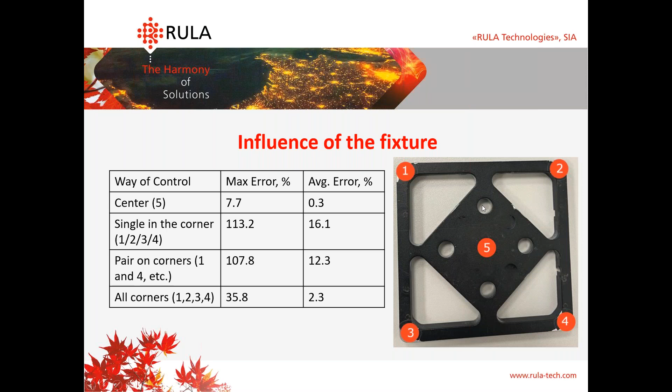And after that, we placed 4 sensors in all corners. I'll show you this example today. And that gave us a way to handle our testing object, and we got the best results. So I think now we can continue with ways of control for multiple channels.

Philips, could you please answer my question? How many ways of control for multiple channels do we have in TestUp? In TestUp, now we have 3 basic ways. It's the control by maximum, the control by minimum, and an average-based way. An average-based way can be split in 2 parts.

The first one, when we enter weight coefficients for the channels as 1, that means that we will calculate an average value using this left formula, or we can set the weight coefficients for the channels. For example, we can enter values like ones for left and right sensor when we have a beam, and a higher value, for example, 3 in the center sensor. That means that the center sensor will have more control value than the others, and in that case we will use this formula.

We will get the channels data, after that multiplied by the coefficient, and in that case we will get the best results. I'll show you the correct example of using this feature using the shock test, but it will be a little bit later. Do we have any other questions?

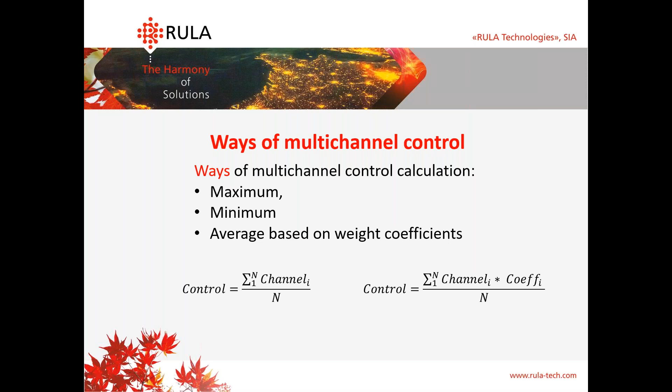It only helps us to avoid the amplitude peaks on these frequencies, and we'll have a sine test example where we will avoid resonances and you'll see it better. Thank you. And now another important feature we have in multiple control channels is protection. In our newest version, we implemented individual limits for abort and tolerance. We can set notching limits. I'll show you also an example.

It can be set as stable now. For shock tests, we implemented individual filtering options. And of course, for sine test, we have a brand new feature which is called open channels control. And it is a really interesting feature because you can continue to run your test when some of the sensors are damaged or disconnected. And of course, I think we will improve this feature. We will improve the channels number for this, and I'll show you also an example of using this feature in TestUp.

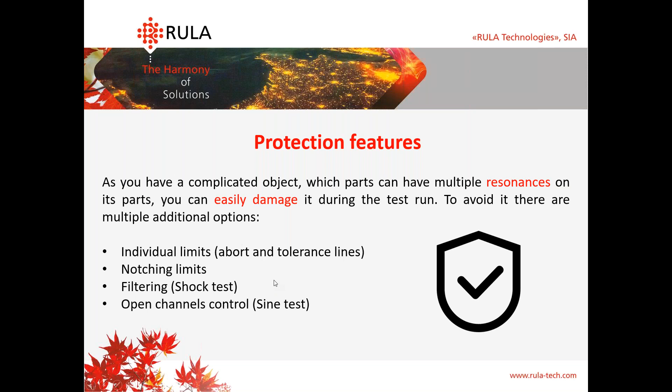And I think now we can continue with our setup. Yeah, let me tell you about today's setup. We have our regular RLC21M controller, RLA200 amplifier, and a shaker. Also, we prepared two objects for testing, a beam and a frame. On the beam, we will have 3 sensors, and on the frame, we will have 5 sensors.

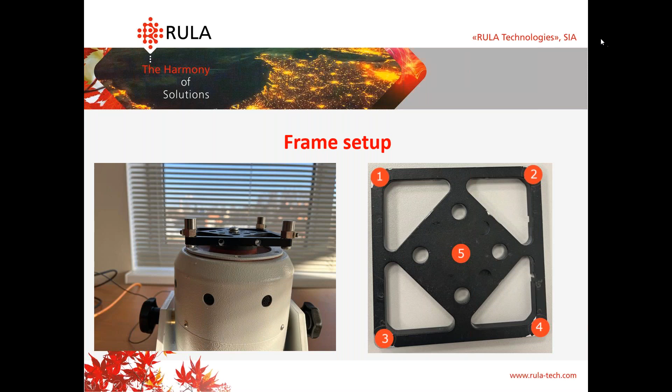So here you see our first setup. It's a frame. Here we will place the sensors into these points. Here it is mounted on the shaker, so we don't have a sensor in the middle. And now I think we can continue in TestUp. And our first test will be sine. Let me check my profiles, and I will also enable my camera. Here you see our shaker.

Let's go to TestUp. And here we need to create a new channels configuration. We have 4 accelerometers. They have IEPE type. I need to check the sound. It's okay. We go to configuration tab. Here we have channels. Let's add a new configuration and call it webinar 1. Here we have 4 IEPE sensors and their sensitivity is 10 millivolts per G.

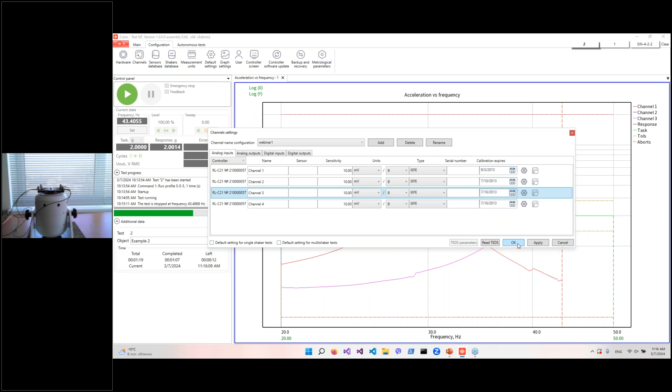Let's press OK. And after that, we need to create a new sine test. Here. We will run from 20 Hertz up to 1000 Hertz, and our amplitude will be 5G. And also, I'll change abort limits. And after that, in schedule, we will have a run profile. And then in channels, we select our webinar 1 configuration and set all our channels as control. And we disable these checkboxes.

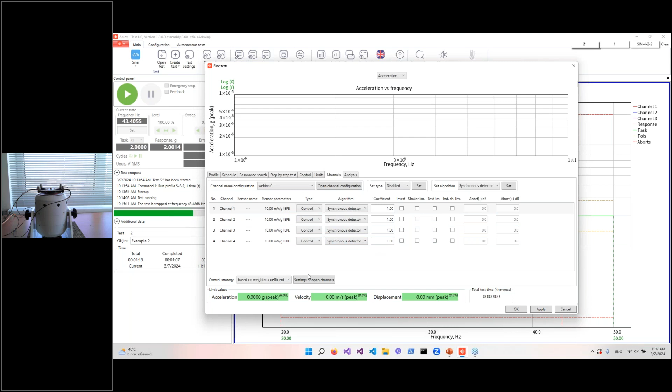This checkbox column means that we will check shaker limits on our control channels. On the right side, we have test limits, where we will check the test limits line. And after that, as I mentioned earlier, you can set individual channel limits like lower and upper abort lines in decibels, like this. And here you see that we have control strategy based on weight coefficients, maximum and minimum. And here we have our coefficient values. Now we will control by regular average. So we can apply the settings.

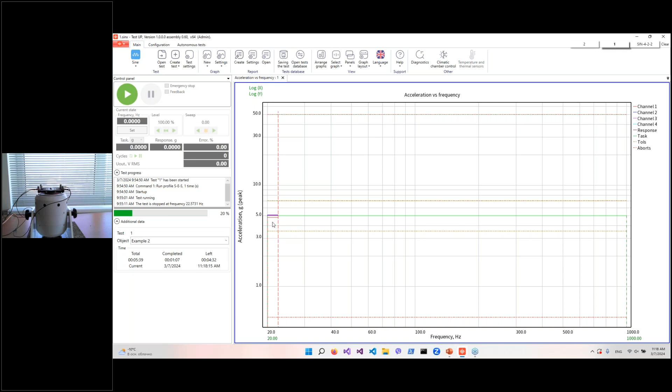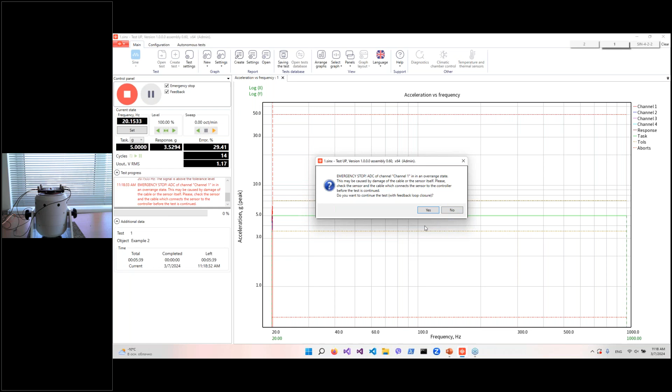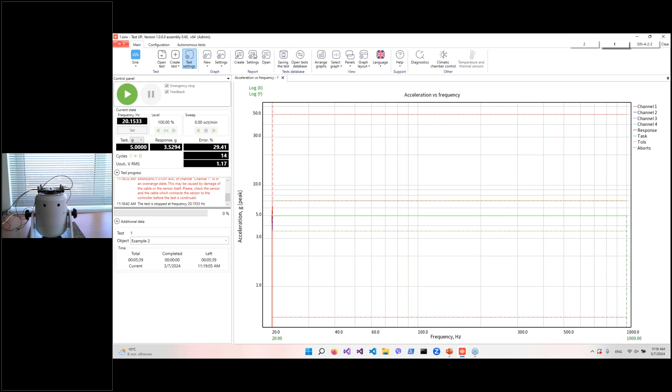Now let me set up the gain on the amplifier. And let's start the test. So let me check my first sensor. And let's set 3G level. I'll test it, and after that we will run at 5G.

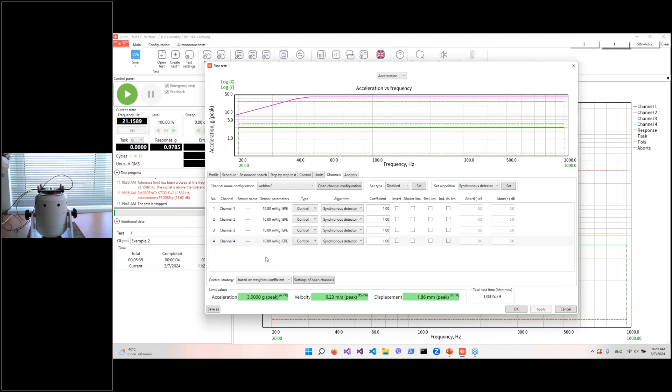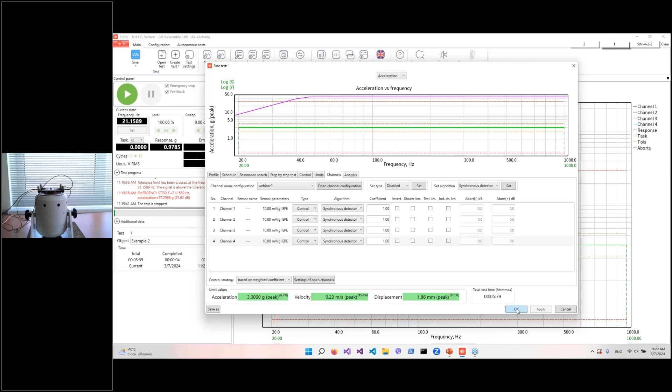So I think we had some issues with the cable. And I think I will change the cable on the first channel. Well, actually, we ran the test before the webinar and everything was okay, but now something went wrong. So I changed the cable. So I changed the cable and now everything is working. Hooray.

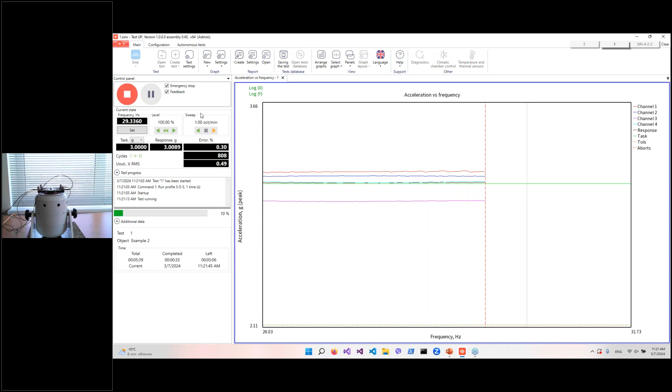So you see that we are running profile, getting the control values from all the sensors. And here we have some resonances here. You see it, I hope. But the main feature I wanted to show you in this test is open channels. Let's stop the test.

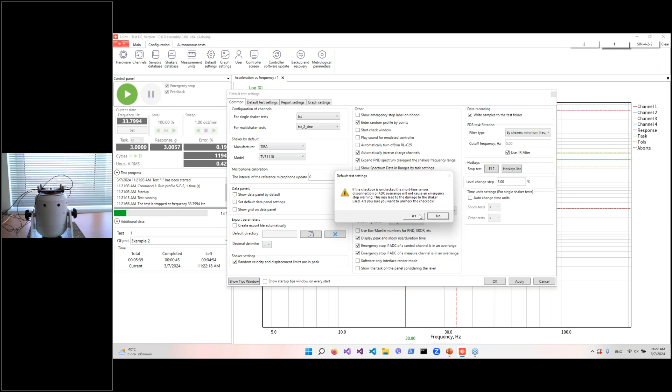After that, to enable open channels functionality, you need to go to configuration, default settings, and here we have emergency stops when we have an overrange on control and measuring channels. We disable it. And after that, we go to our settings. And here we have settings of open channels. We go here, enable this functionality, and let's set the number of open channels as 3.

What does this feature mean? When we run the test, we can have our object damaged, or we need to damage it, and some of the control sensors can be damaged, disconnected, or if we have a resonance, they can get zero amplitude, and this zero data will go to the control and be averaged, and it's not correct. And in that case, we will discard this channel's data.

So all sensors have a stud mounting, but the sensor here has another type of mounting, and during the test run, I'll disable this sensor. So let's apply this feature. It is still control. And we run this test. Here you see that we are running. And now I'll take the sensor off, and we're still running.

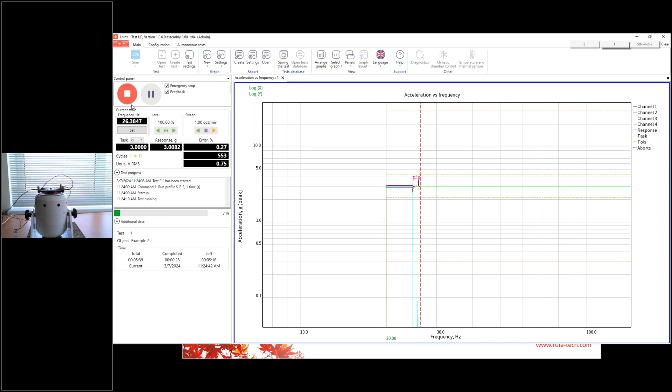After that, let's go to test settings and, for example, change the control strategy. We will set minimum, and let's place the sensor back. We apply the settings and run the test again. Let me double check the settings.

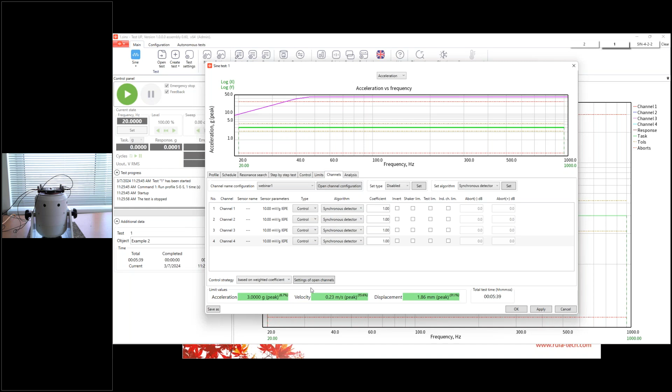Oh, I see a message in the questions about Murphy's laws. It's true, because we double checked everything before this webinar. And I think I need to check all the cables again for all the sensors.

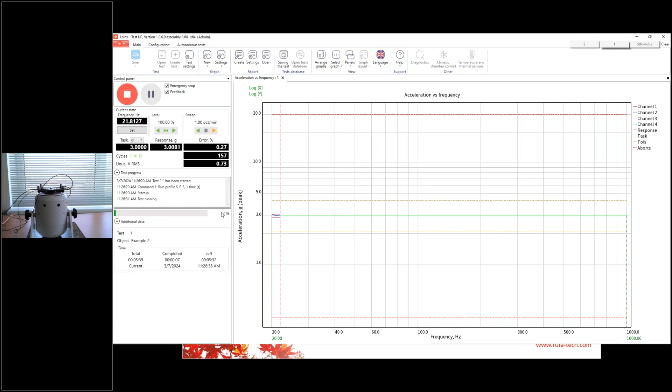So you see that we are running, and let's disable the fourth sensor, and we will disable the second sensor. And you see that because we disabled two sensors, we got higher amplitudes because only two channels are used for control. Let's stop the test. Put the sensors back. And now I think we can go to the next test. It will be random.

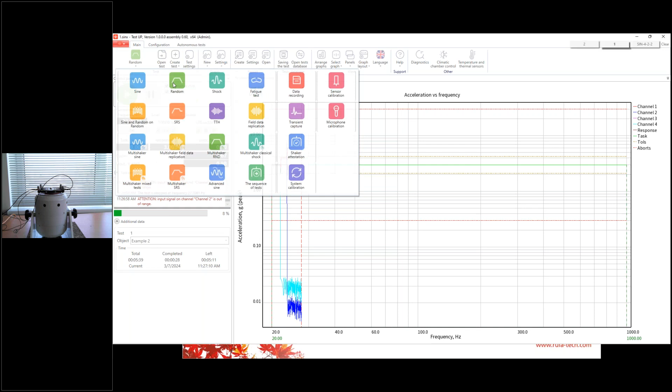Let's check our questions, or maybe you have questions. Yes, I have a question, Philips. Can you please explain to me why you have open channels only in sine? We have open channels only in sine test because in sine test we get data for only one frequency.

For example, in random or shock, we calculate the control values using the full spectrum. And in sine, because we have a fixed frequency sine wave, we can enter some resonance frequencies, and in that case, the control data on that sensor will be rather low or will get zero values, and this situation can happen only in sine. Okay, I got it.

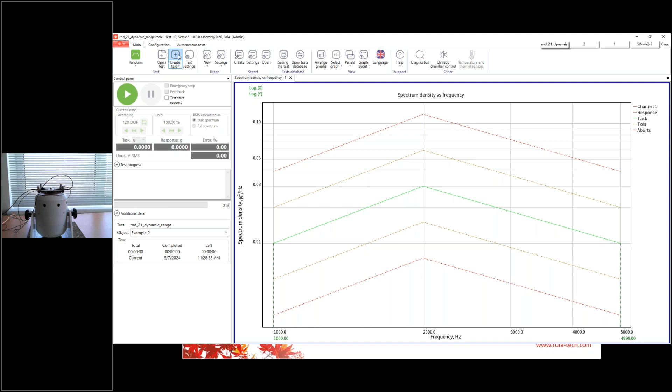Thank you. And our second test is the same frame with 4 sensors, and it will be random. Let's create a new test. We will run from 20 Hertz up to 500 Hertz. And here I want to run it at 4G amplitude value, so I use the recalculate feature.

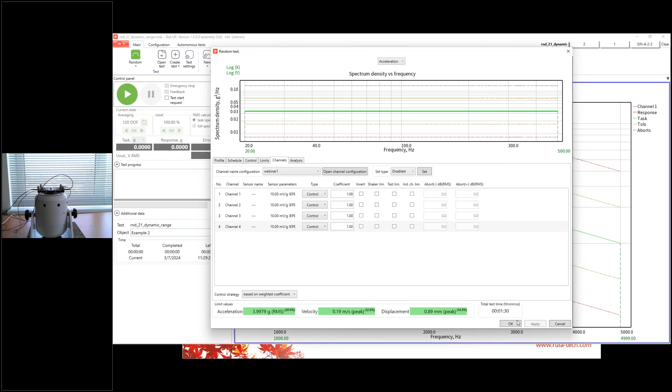We will run this test for 90 seconds, and after that we will change the configuration, and here set all the sensors as controlled. And after that, I'll show you the notching feature. So let's turn on the gain and start the test.

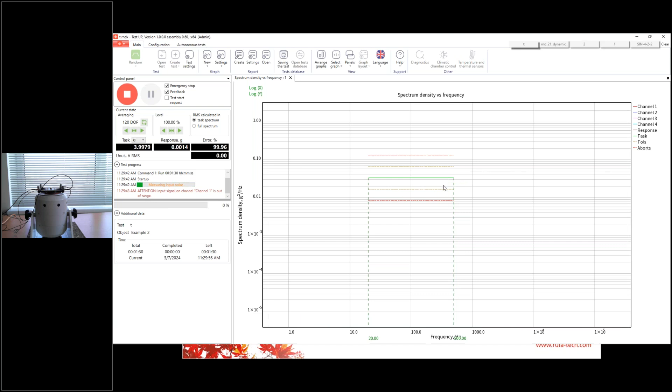I think I have some issues with the first sensor. I think soon I'll need to replace it.

We have a question in our question box: Do you have notching at ranges? Yeah, we implement notching at ranges, and I think I'll set it right now to show you an example. Let's go to test settings, go to limits, and here we have our notching. Let's set an upper limit for the 4th channel. We set it as limit table, and here we can enter our values.

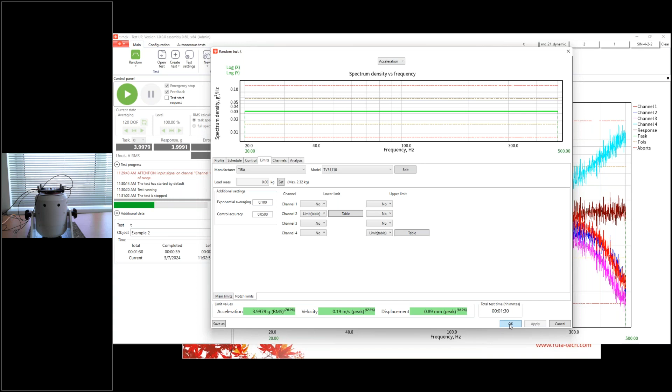And here I enter the required value of 5.5G, because we have a profile with 4G acceleration. You'll see an interesting thing on the graph. Here we have this upper limit, and here we have another limit for the fourth channel. So let's start the test. Now the system is starting up.

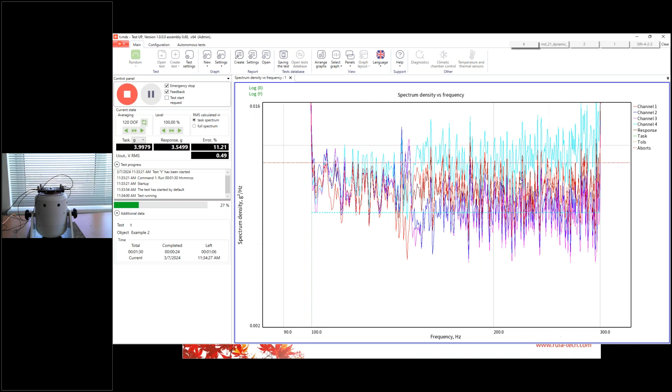And here you see that on the second channel, we increased the control values from 40 to 60 Hertz. And using notching on the fourth channel, we changed the control value here in this range. We still have a main profile line, but we changed our control values using notching like this. And I think I can stop the test now.

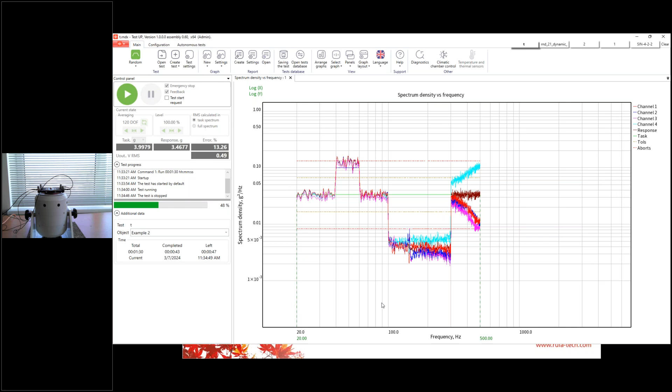And now we're going to change our setup. Let me show you the picture. Here we have a beam with 3 sensors. And let's go back to TestUp. I'll stop the webcam and I'll change the setup now. It will take some time.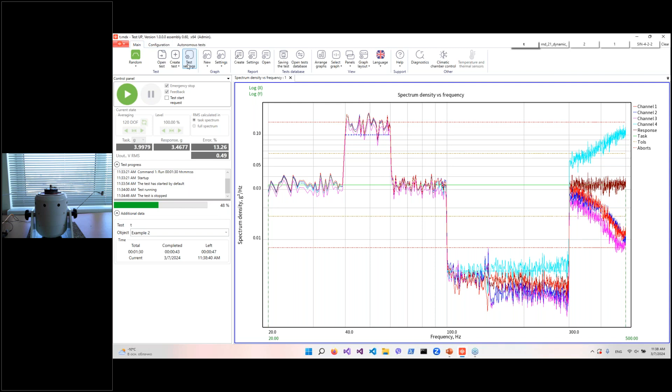Go to channels. Let's add webinar 2. Here we change to charge and apply the configuration. We will switch back to sine test. Let's create a new test. We will run from 20 Hz up to 50. We will have a lower amplitude of 2G.

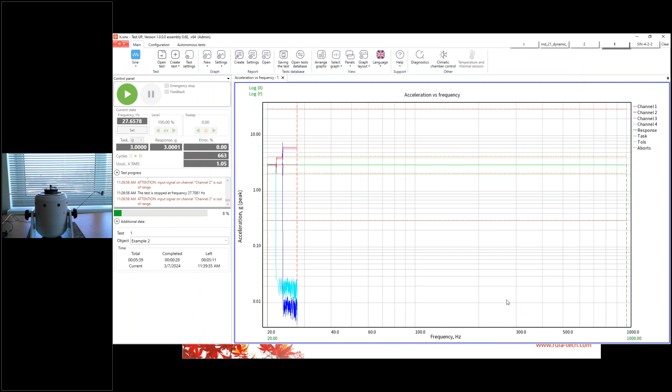And now we set webinar 2. And now we will run with only one control sensor. It will be the second one. And the first and the third will be only measuring. And now I'll apply the settings. Let me double check. And I think now we can start. Here we started the test.

Soon you'll see an amplitude increase on the first and the third sensor, and we'll get resonances. Here you see we got a peak. And now I think we'll get a resonance on the other side. So we have two perfect peaks, and the center sensor is going right across the task line. Now let's stop the test.

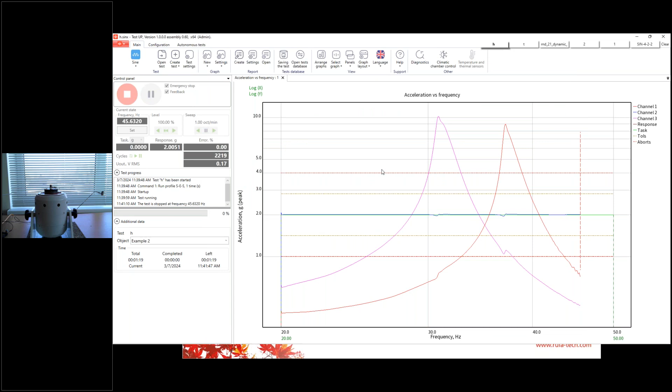You see that the values are higher than this, but our control value is going across the control line, and I think we will get lower peaks, and by changing the values of the coefficients, we can decrease their sharpness. So the peak is lower now. We still have a resonance, but its peak amplitude is lower. And I think using this feature, you can try to avoid really high and sharp peaks. So let's stop the test and increase this value more.

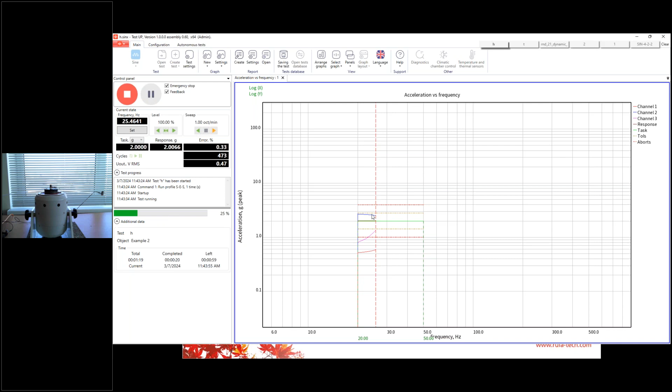So weight coefficient is a really nice feature. I always use it when I have to run tests with multi-channel control, and sometimes it can help you to start the test, which you can't start using the maximum or the minimum control values. Let me scale it a bit. So changing these parameters, you can get different results and find the best settings for your setup.

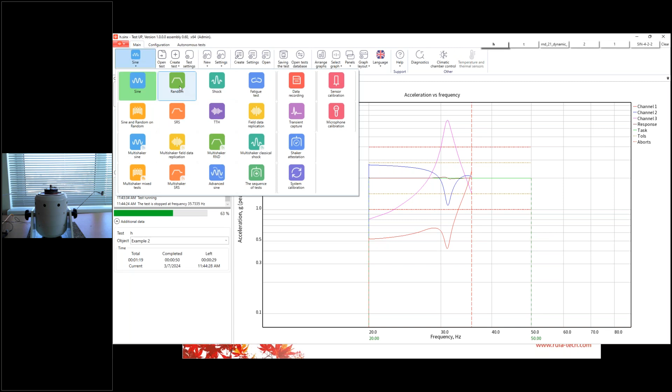And now we go to our final test. It will be shock. We will run regular shock. Here we will set our peak amplitude as 4G. We will perform 100 shocks. And here in the channels, we change our channels configuration, disable the fourth channel, and set our IEPE sensor as a control one.

After that, as I mentioned, in this feature, you have independent filters for the channels. For measuring, it will be applied and used only for data visualization, but for control channels, data will be filtered and used for control. So let's start the test, and after that, we will find the best filtering options. So let's start the test.

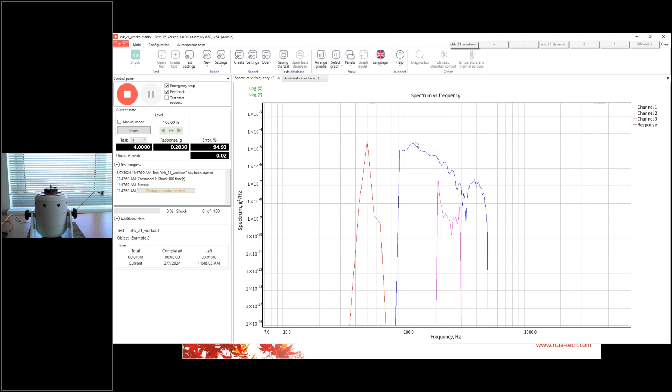So you see that our spectrums are filtered. You see only the desired frequencies. Let's wait for startup.

Philips, I have a question. Could you please explain how you average shocks? Using averaging in shocks, we take the filtered data which is averaged by their weight coefficients, and all is done in frequency domain. I think that's the best explanation I can give, but if you want more information, let me think a bit. Okay, thank you.

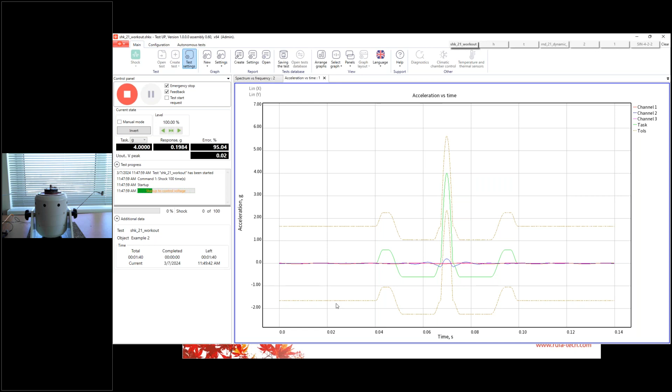So you see that because of the filter on the control channel, it doesn't have a wide frequency range, and the startup may take a long time. So let's stop it and disable the filter on the control. And also we will run this test with 3 control channels. And now their weight coefficients are equal. I know that in that case we'll get either an emergency stop or startup failed, and after that I'll show you how to fix it. That will happen because of the data from the third and the first channel.

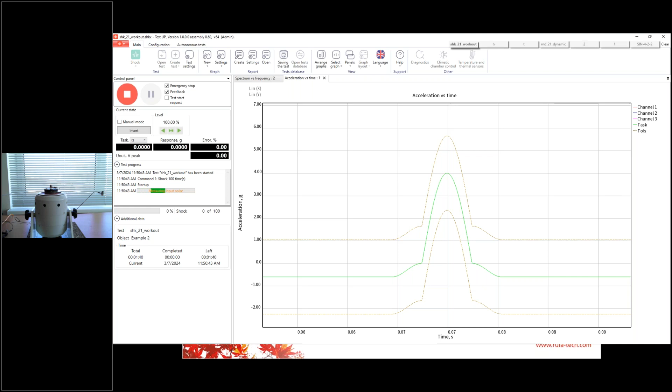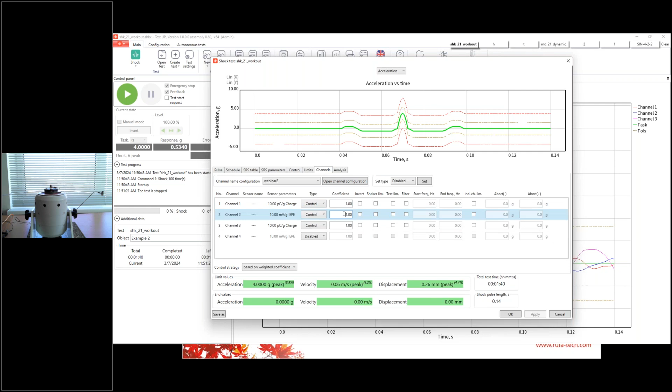So you see the second channel has some strange values here. Its waveform has some peaks here. And in that case, to fix it, let's stop the test. We will change its weight coefficient. Here we set it as 3. And that means that the data from the second channel is more important for our control process. So here you see we had a quick startup and we are running the test.

But you see, because of the control using 3 channels, we have changed our waveform, but in that case, if you don't have the ability to place a sensor in the middle, you can use these features to get better results. Right.

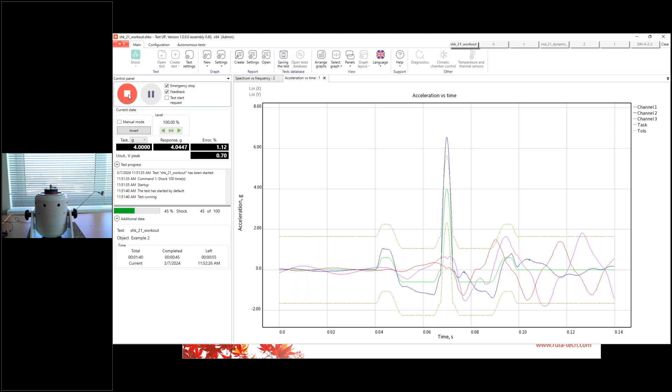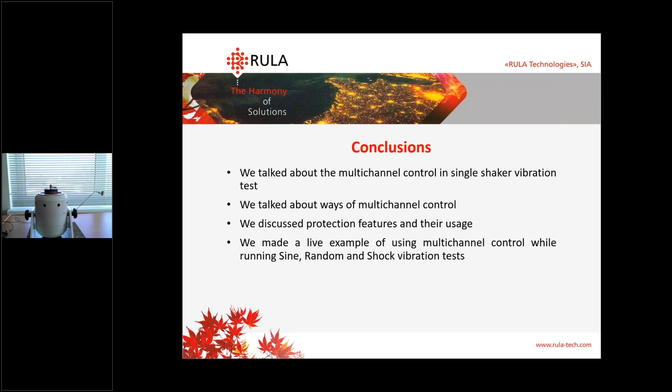So I think that's all for the tests now, and we can make a conclusion about this topic, which I find really interesting and important. So we talked about multi-channel control in single shaker vibration tests. We discussed ways of multi-channel control, protection features and their usage, like notching, open channels, filtering, and of course, we made a live example of using the multi-channel control feature while running sine, random, and shock vibration tests. The webinar was really interesting, and we got one more question from you.

So, Philips, do we have multi-channel control for loops in multi-shaker tests? That's a great question. I think we'll try and develop it in one of the upcoming versions, but it will take a lot of time because all the control algorithms must be changed. It must be tested because, as you know, multi-shaker tests are a really complicated thing, and we need to check that all our safety parameters and control features are working exactly as we expect, because we don't want to damage our customers' equipment. So it must be tested. But maybe at the end of this year or next year, we'll get this feature because it takes a lot of time to develop.